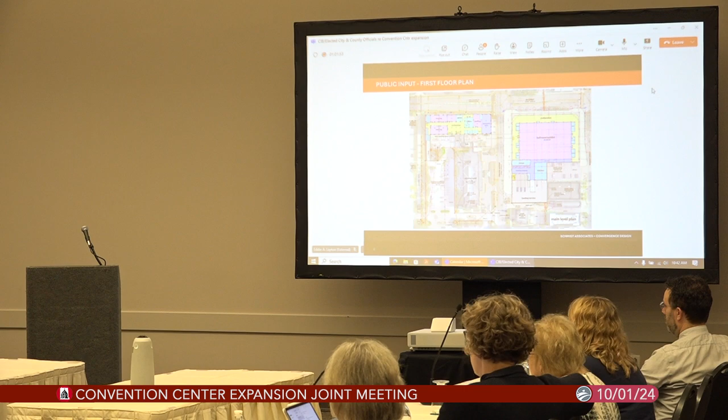What's most important here— and I'm going to not take this mic with me. Can I take that mic with me? Hello. Okay, all right, I'm going to Vanna White this.

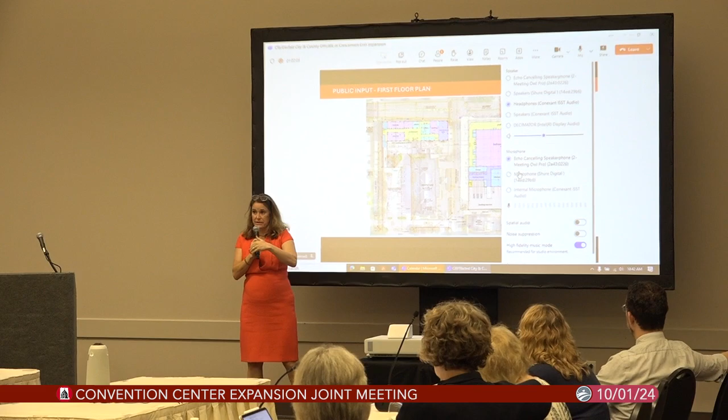What's most important about this building is that it is an addition and renovation that comes together as one complete facility when all is said and done. And when we talk about the building across the street, could whoever's running that make that go away?

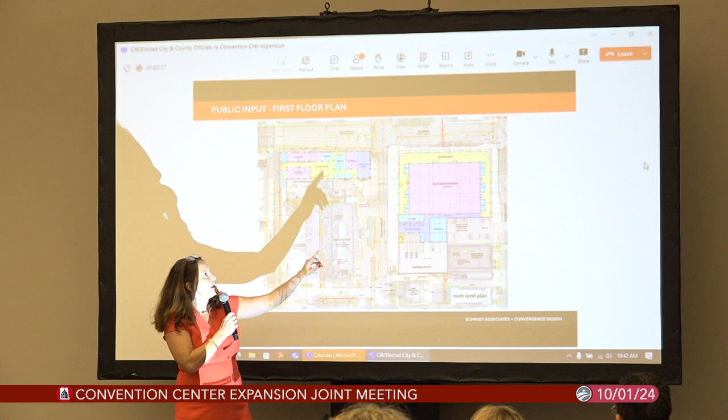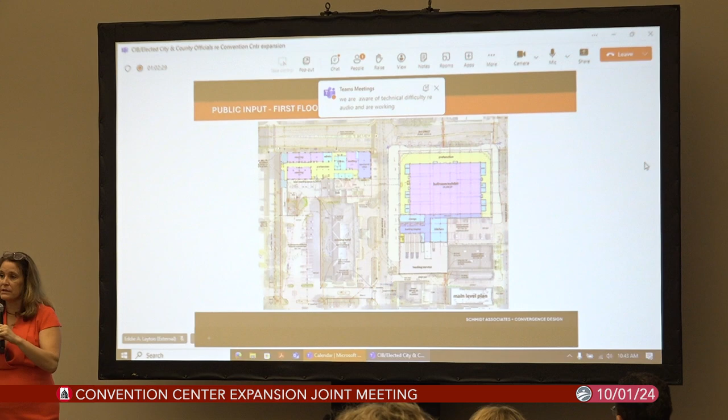Thank you. What's most important about the building across the street is that the core of that building is the exhibit space. That is most of the space we're building across the street — one giant exhibit space that is tall enough for basketball, tall enough for volleyball, tall enough to drive a fire truck in, if that was the convention you wanted to have — the firefighters union could have a conference in that space. And that space is subdividable so it could go into a series of smaller spaces too, much like this room we're in right now, except with a newer, better version of these walls.

So that is the main thing that happens across the street, with gathering and entry space in the yellow all the way around it, and support spaces behind it. That's where we tuck in our delivery trucks, our semis, our garbage. That's where we have our brand new kitchen that serves both of these spaces, all tucked behind.

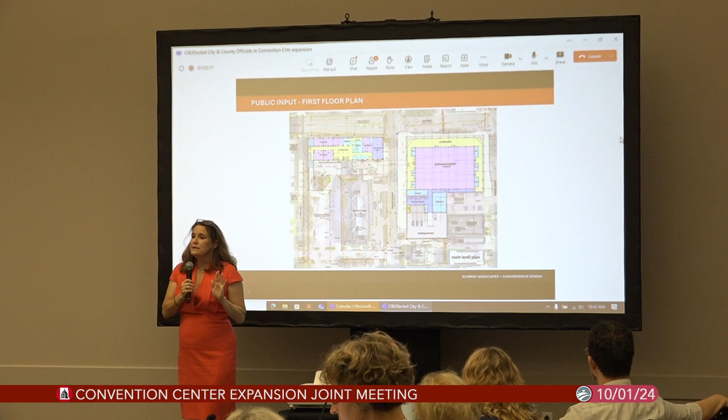In this building, really, fundamentally, it is going to stay in a space arrangement like it is right now. There are things we need to fix here — a little bit of money we need to spend to do some upgrades. But fundamentally, this building can function like it does now.

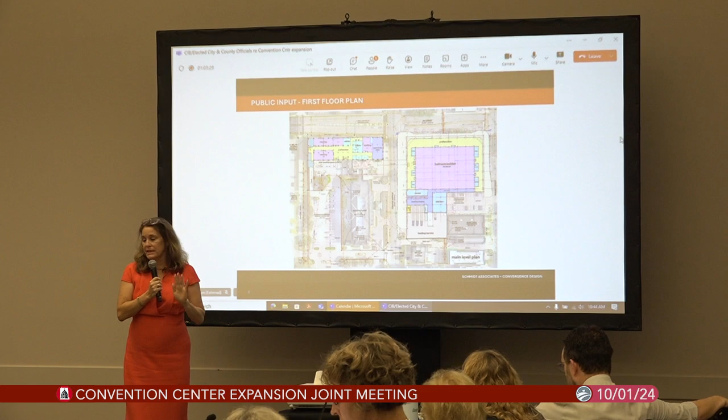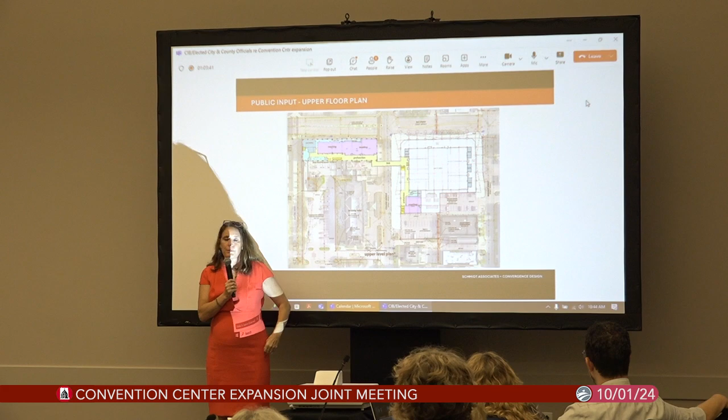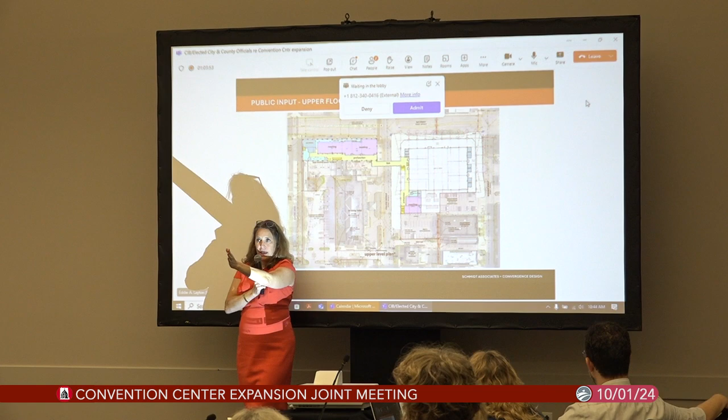On the second floor, as we had this drawing originally, the second floor stays fairly similar to the way it works now, and we have a little bit of meeting room space on the other side. Here we have our bridge, and we were showing a new hallway, adding some flow space out of the big convention space here. That's where we left off on that floor plan.

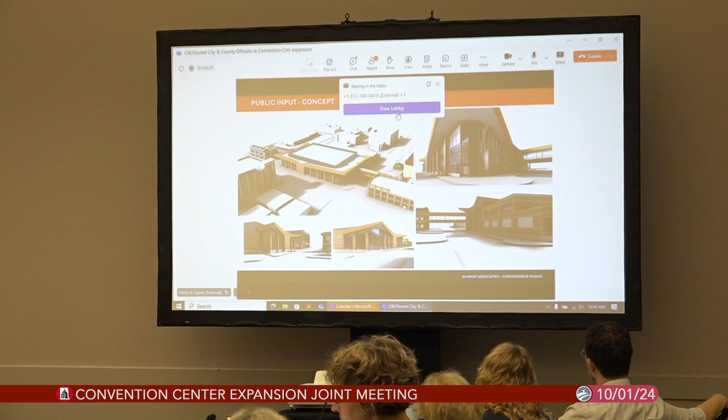And it looked something like this, with a kind of complicated roof line, tilting up at the corners, welcoming visitors from both sides. What you see here in the back, that big box, is the taller exhibit space behind. There's no reason for the public lobby space in front to be as tall, so we're trying to drop that down to pedestrian scale.

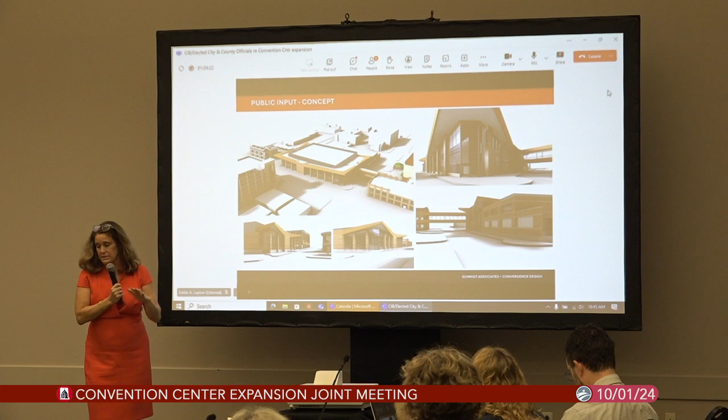So that's what we took — microphones, it's just too many. Okay, so that's what we took to the public meeting when we met several weeks ago.

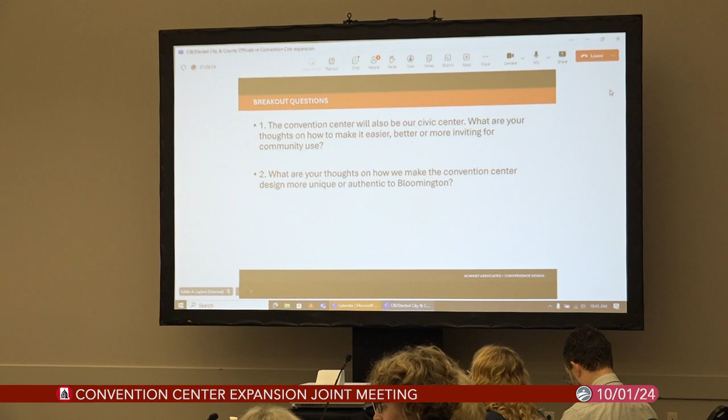And we asked two questions: the convention center is a civic center — what are your thoughts on how to make it easier to use, better, more inviting? And what are your thoughts on how we make this really authentic to Bloomington? We got great feedback, and like at every public meeting, some of the feedback ends up being a little contradictory, but there were definitely through lines.

One of the through lines was, where's the limestone? We're a place where limestone is significant and important, and this is a brick building, but there should be some limestone in the relationship.

Where can we look at opportunities for public art and how that integrates into the space? Can we make it more pedestrian scale? We appreciate that the lobby drops down lower than the big exhibit hall behind, but is there another way to think about taking that to a more pedestrian, human scale?

Is there another way we can connect with nature? We know we're going to fill up this entire block with building, but is there an opportunity for some green space? How do we make it more contextual with Bloomington downtown? And how do we make it Instagrammable and authentic — where's the spot you're going to take your picture and know that you've been somewhere?

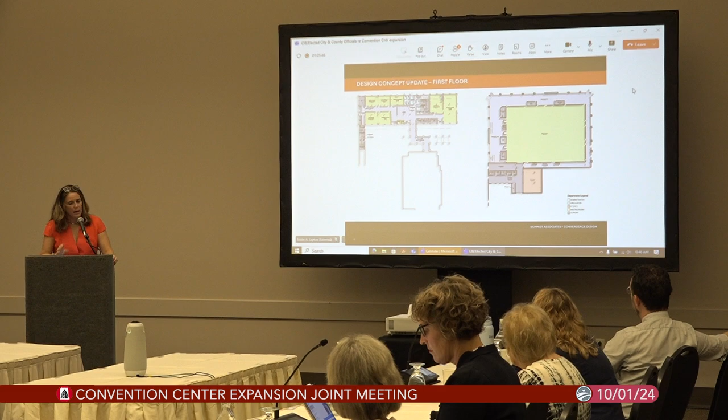All right, so now I'm going to have to walk over there with the thing. All right, that's okay, that's all right. All right, these are my 10,000 steps for the day.

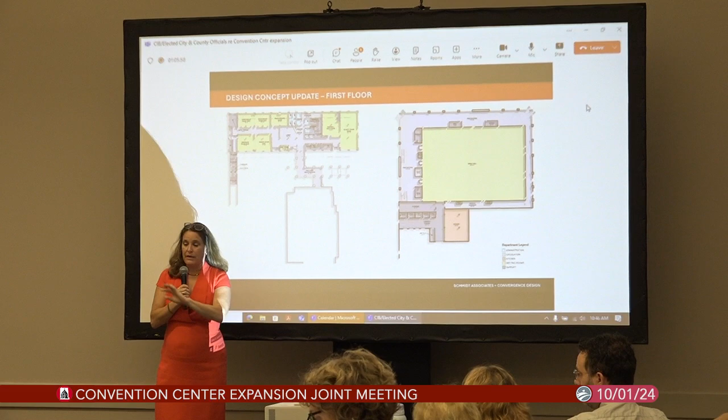So with all of that in mind, the team went back to the drawing board and started to make some changes. I feel like this is a little hard to see here, but there are a couple really important changes that I want to point out.

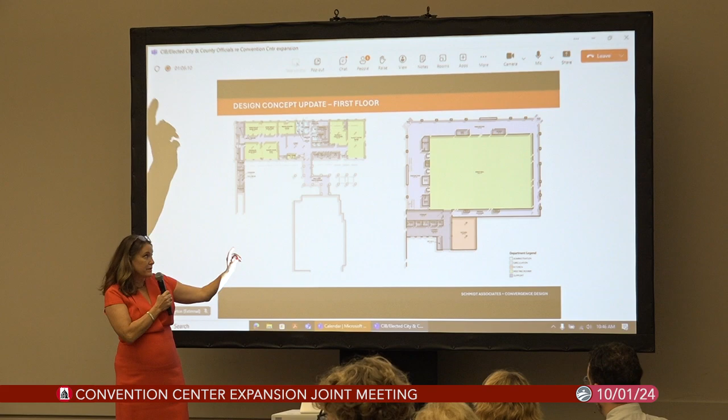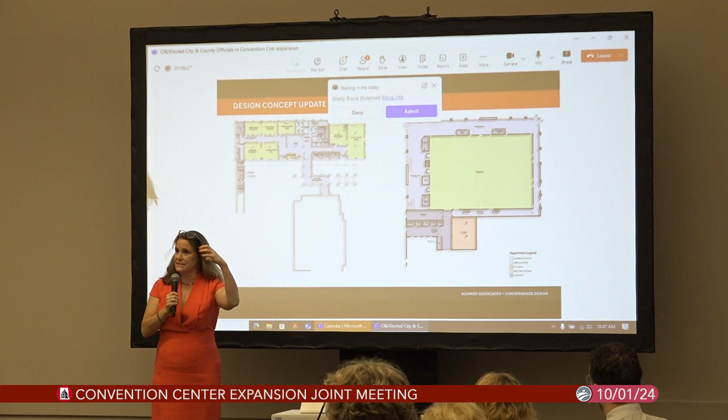One of the changes was, as we started to look at how you create a place, how you really create that center of gravity where people will gather, we started to question whether our lobby space all the way around the building really needed to be equal on all sides, or whether we needed to take the big box of the exhibit space and move it off just a little bit to the side.

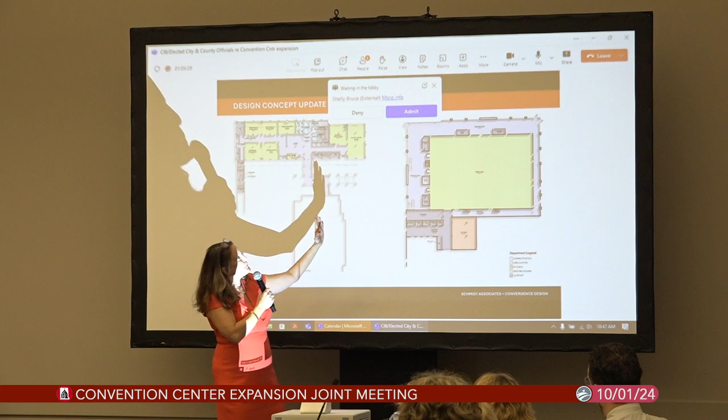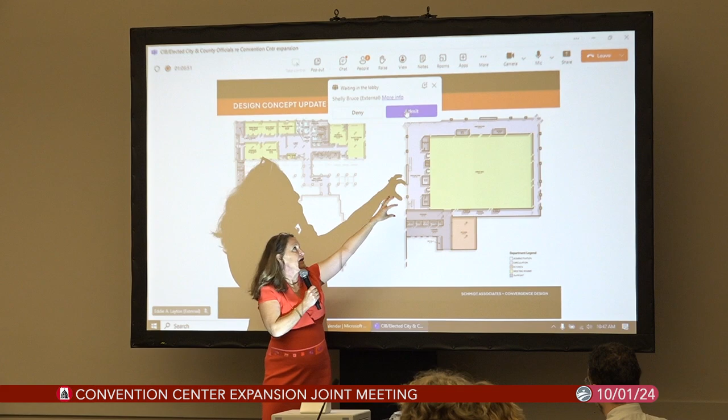It's super important that you have a way to circulate all the way around for lots of reasons, moving people, moving food, moving stuff. But when we push the box just a little bit, what ends up happening is we have a center of gravity that's starting to be created between the renovated half of the convention center and the new half, because we have extra space right on that corner.

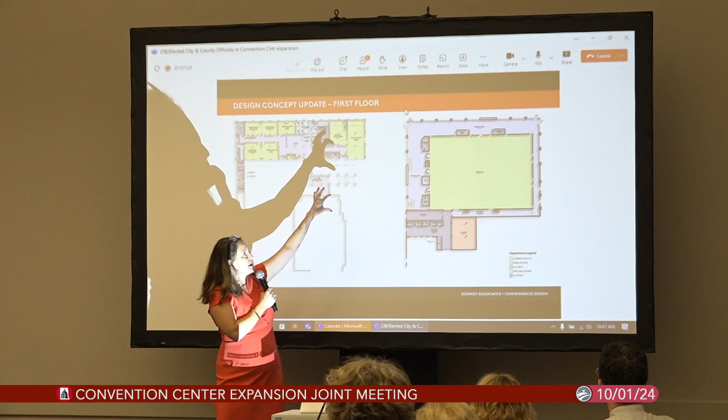Where we can really do some interesting art integration. We can really open up into the streetscape, and we start to create really a sense that this is one building, not two. And so that's an important shift. Even though it seems small, I think it makes a huge difference.

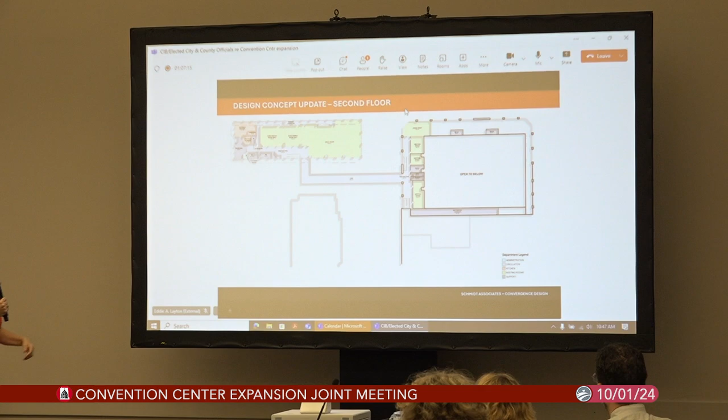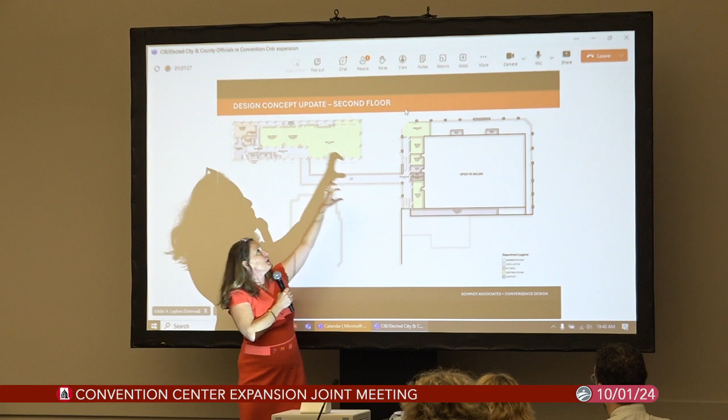And the other thing we started to question when we pushed over, could we start to make the second floor of the new addition have a better relationship with the existing building? And when we did that, when we pushed our box over, what that allowed us to do is...

Gather all our meeting spaces right adjacent to the bridge, so that it would have a beautiful view to this half of our addition. And it lets us open up the corner so that we could have a roof garden there, an accessible roof garden on the second floor.

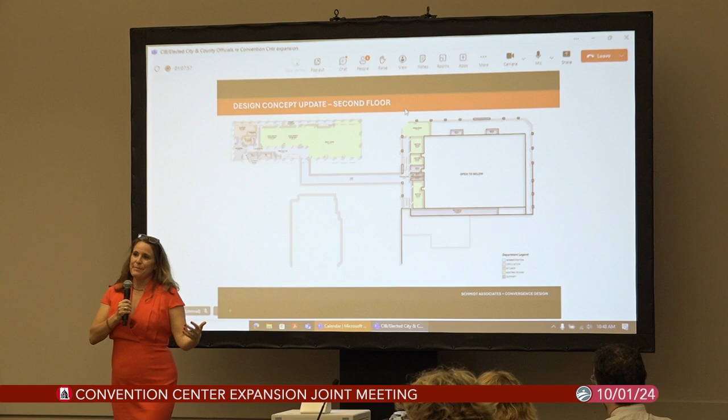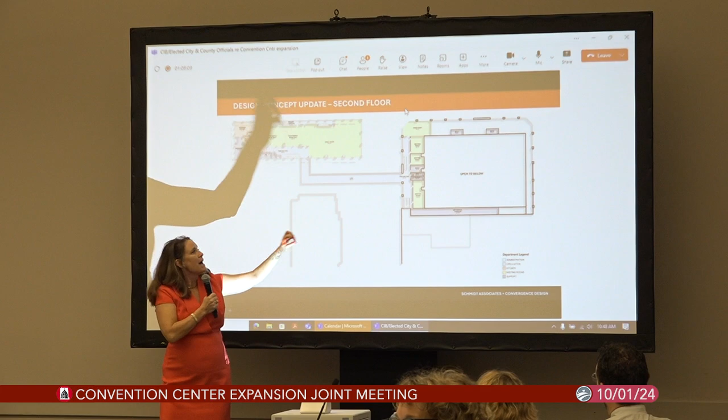And so from that space, that little green box up top, you could step outside and actually look to the rest of downtown proper and have an indoor-outdoor experience, which I think is infinitely rentable, Talisha. You could sell that tomorrow. I'll have a glass of wine out there. But it also starts to make this a very special space and place.

The other thing we started to question is, when we're going to bring that new bridge to this building, do we really want to start cutting up our historic corner up at the very, very edge? It's such a nice space.

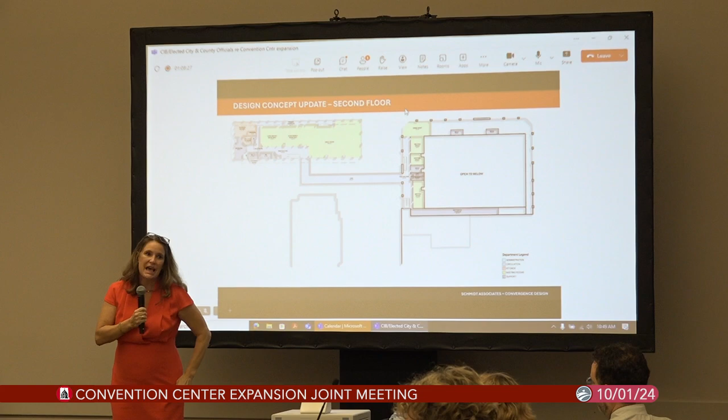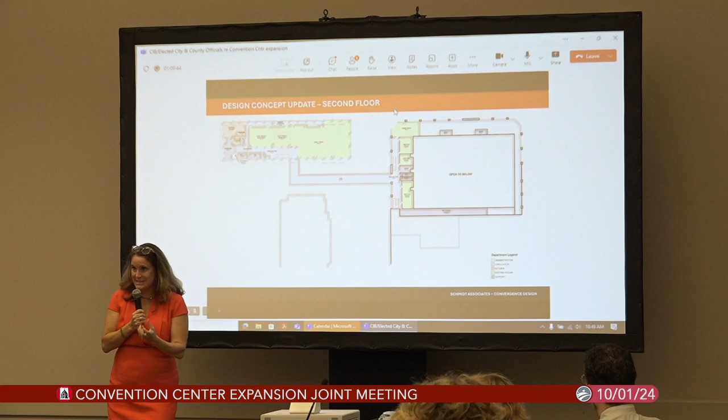And so we're looking at ways to bring our bridge just a little further down the building before we tie in and make that connection, which lets this beautiful facade stay pristine and be a beautiful facade, right? Which I think goes directly to authenticity, right? Like this is a real place, and we should protect it.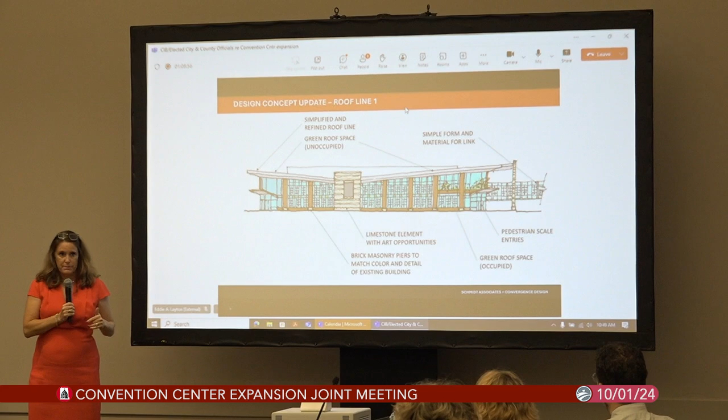So then next what we started to do was look at the elevations again and say, once we make those two big moves — Eddie, can you just... thank you, you're the best — so next what we started to do was say, once we do those two things, what can we do with scale, and what can we do with greening the facility?

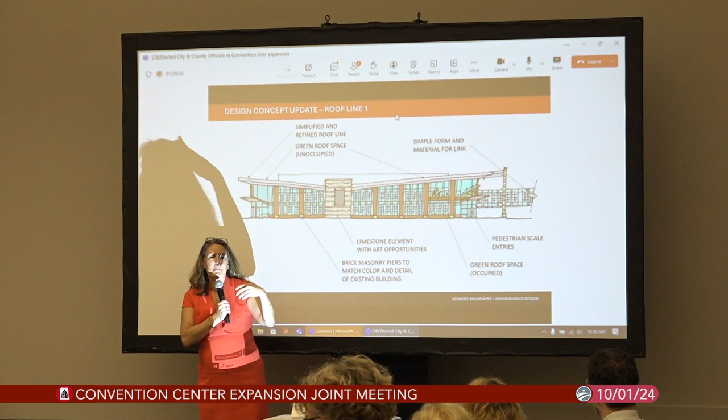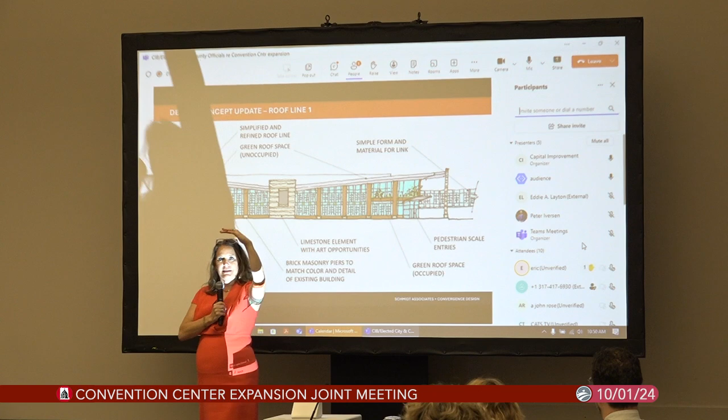And also we can start to integrate new entrances, which drops that scale down and the canopy entrance down. So it's more like 9 or 10 feet, and then another 4 feet to the next second floor before we jump up to the lobby level, before we jump up to the exhibit hall. I think that feels much better when it relates to this building, but it also feels much better as a pedestrian.

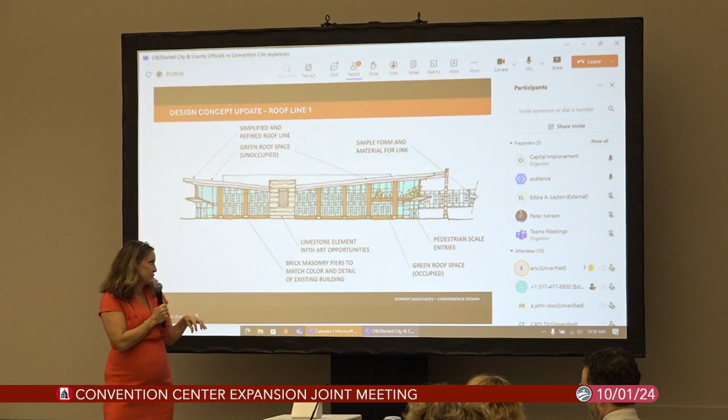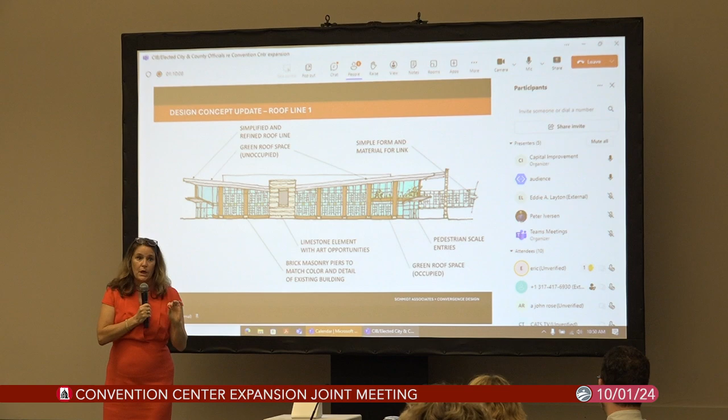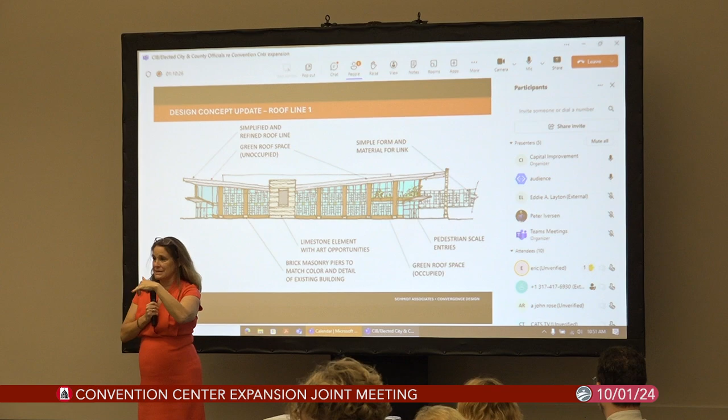We started to talk about if we have a butterfly roof, which is what this is showing. Would the break in that roof be an opportunity to integrate both art and limestone? Could we make an element in that space with maybe Easter egg carvings, little ones that you find if you know what you're looking for, giving us shades and shadow. It's a nice break with the brick, which will be the same color and tone as this building, picking up on the historic nature of what's here but breaking it with limestone in the middle.

The other thing we really pushed on pretty hard was making the bridge more beautiful. I think the way to do that is to make the bridge replicate some of the window patterning happening here, making it a simple, elegant piece that takes you across the street but also gives you a reason to pause and look up the street to the rest of Bloomington.

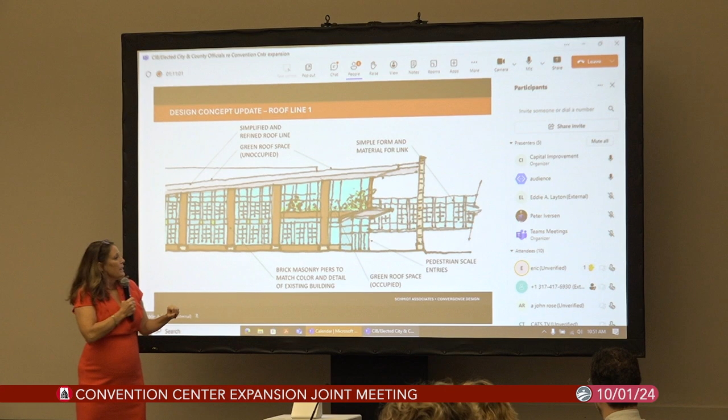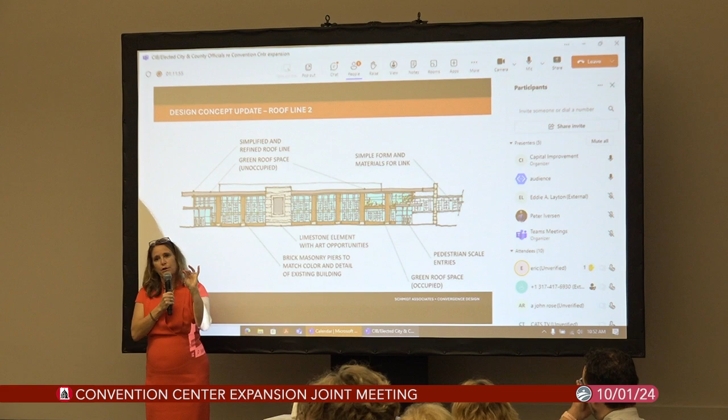So then we started looking at it another way — can we take all those same ideas and simplify that roof line, and is that better? Really what we're designing is a big, beautiful pavilion, that's really what it is. So there's an option where we'd take the butterfly roof and make it a clean, crisp, cantilevered line all the way across the building, and that's what you'd see here.

The other elements fundamentally remain the same. In fact, from the viewpoint of a pedestrian walking down the street, it would feel very similar to the first option.

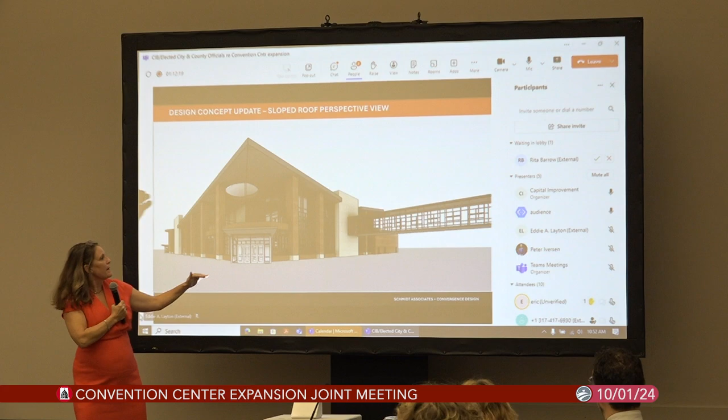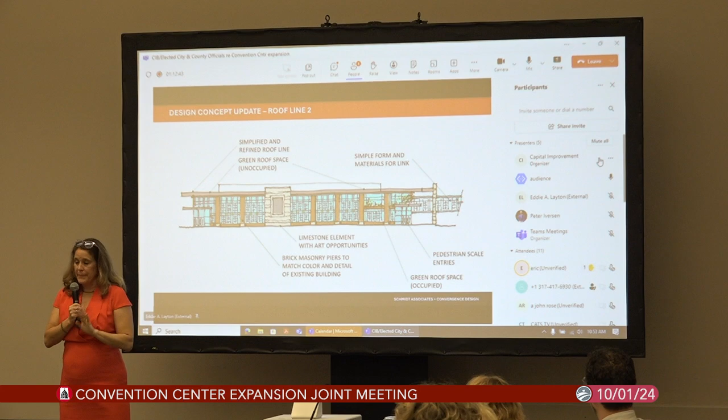But functionally, what that does is allow us to bring the roof plane even a little lower than the butterfly while still keeping a modern edge, still relating to the building across the street, and doing the rest of the things we talked about. So that's where we are with our current floor plan updates and elevation updates based directly on the feedback we received, going into the next board meeting.

I feel like we're getting closer. Like I said, design is iterative — it's a big spiral, you get closer and closer to the right answer. As we've spun another round here in the last two weeks, I feel like we've gotten closer to the right answer: more elegant, a better use of space, and more respectful of what's happening here.

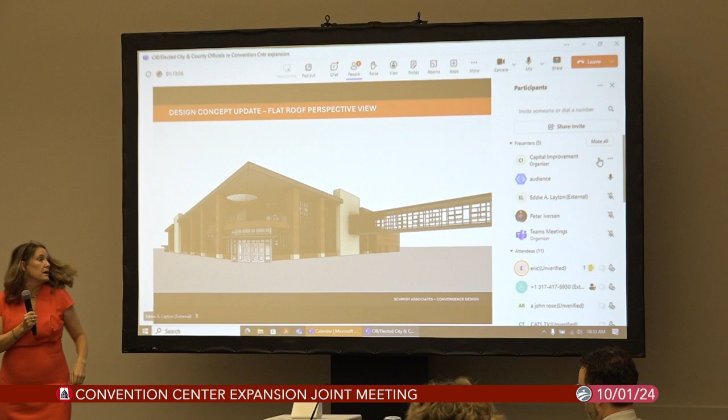In addition to that, we continue to look at requests from the city letter and how we can integrate those things into the project. We've made ourselves a little scorecard so we can keep score and make sure we're doing these things. As you read through each item incorporated into the project, some are policy and procedures, which is well above the pay grade of any of our architects and engineers, but they're in the green column if we've been directed by the CIB that they belong there.

But some are directly related to design, and those things we've fundamentally been able to accommodate most of. So when you think about things like a compact urban form, and trying to create community character through the main entrances, making those welcoming and human scale, with each iteration we're trying to get closer and closer to meeting the true core of that intent.

One of the things that's pretty important to note here is that we are not adding new public parking as part of this. We're lined up with the parking garage across the street. That was a specific request in the city letter, that we use the parking we have to service this facility. In fact, that limestone element is directly related to the parking garage across the street. So we're trying to be good neighbors, build out the urban fabric, and acknowledge that these two things go together—park here and then come to the convention here.

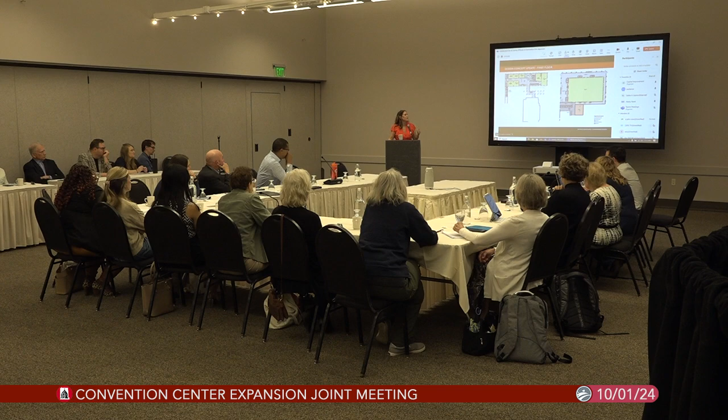The entirety of the loading zone will be happening behind what, to an observer walking down the street, will just read as a wall of the convention center.

Just as a quick follow-up — is that an alley platted over there? Is the entrance to that space going to be on both sides? I'm interested, if you have it on the slide, in an overview of what that street area would look like.

Yeah, thanks Eddie, that'll get me there. Yeah, thank you.

Hello. So this is the older version of the plan, but it's the only one I have here that's actually on a site plan. This will give you a sense of what's happening.

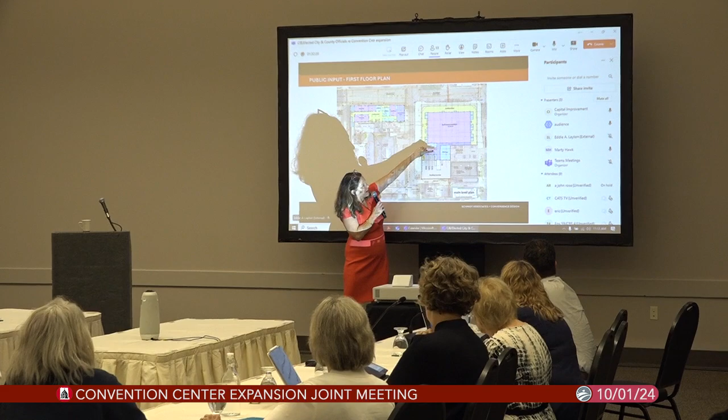Here's our loading dock with our drive-through aisle right there — 3 semis plus 2 box trucks unloading simultaneously, space for all of that. This is the wall of the convention center. Trucks pull in this way, back into that space, and can pull directly out. That's how this loading yard works.

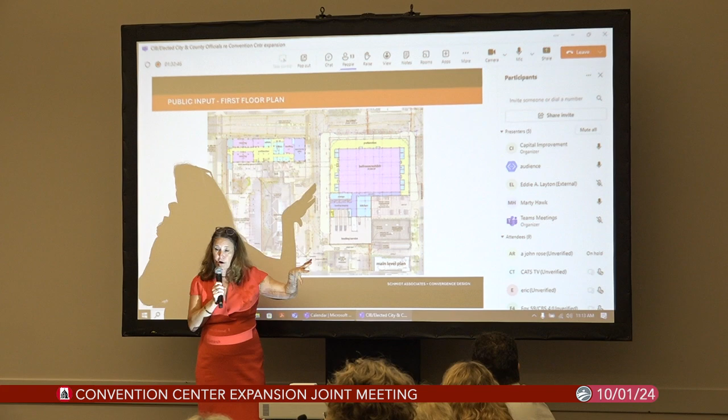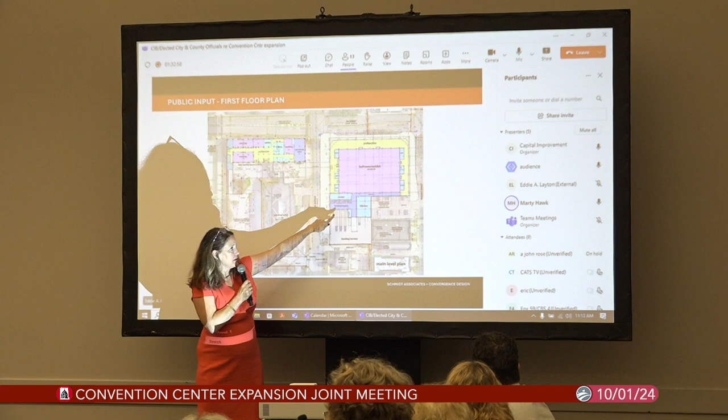There's an alley here, and there's also an alley here, but those alleys aren't large enough to pull semis through them. Semis must pull into this lot and out of this lot on this street.

So we did test that — not by actually driving a semi through there, but to see if a really good semi driver could do it. The answer is no, you cannot, not unless you can shrink your truck.

This lot here does not belong to the CIB — it's a private lot, so we cannot go through that direction at all. There will be no through traffic going that way, and none through the alley either.

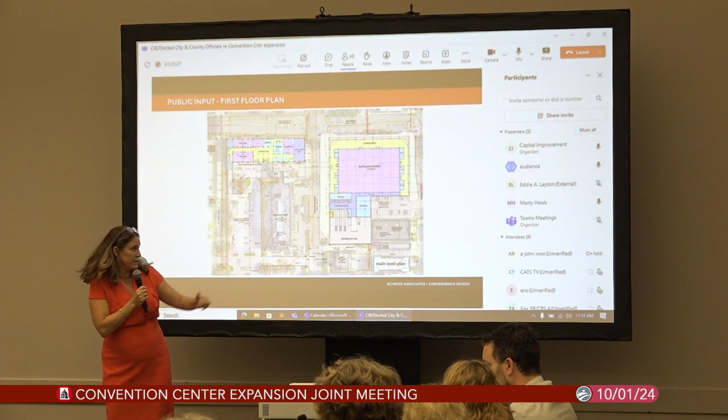I have a question about the roof. I know you said the butterfly configuration wasn't the current plan, but I thought the sawtooth design was iconic for Bloomington, and I'd urge you to give serious consideration to adding one, two, or three teeth.

To be clear, what's under evaluation right now is the butterfly roof, which is a simplification from before — we previously had a roof folding in multiple directions simultaneously, or the simple cantilever roof. The butterfly roof is not out of consideration right now; both are being considered. But thank you.

This is more of a comment than a question. There's been discussion in Bloomington about making both College and Walnut Streets two-way streets, and I think we need to be mindful that this will operate much better if College stays a one-way street. Thank you.